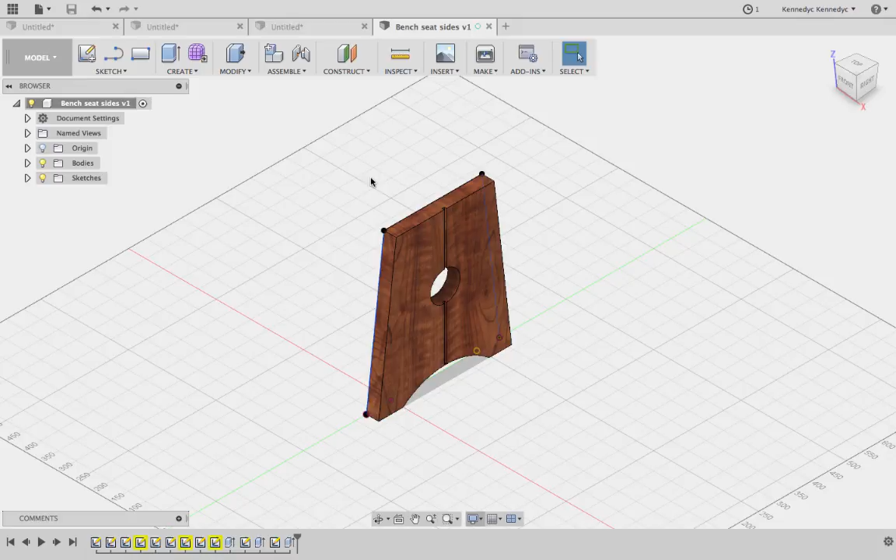The second way, and possibly even the easiest way to make the bench seat sides, is to come through and insert your plans as a canvas. So I'll show you how to do that.

I've actually taken a screenshot of these plans. You can do that easily. If you've got a Mac, Command Shift 4 brings up these little crosshairs and it asks what you'd like to take a screenshot of. Just that section there.

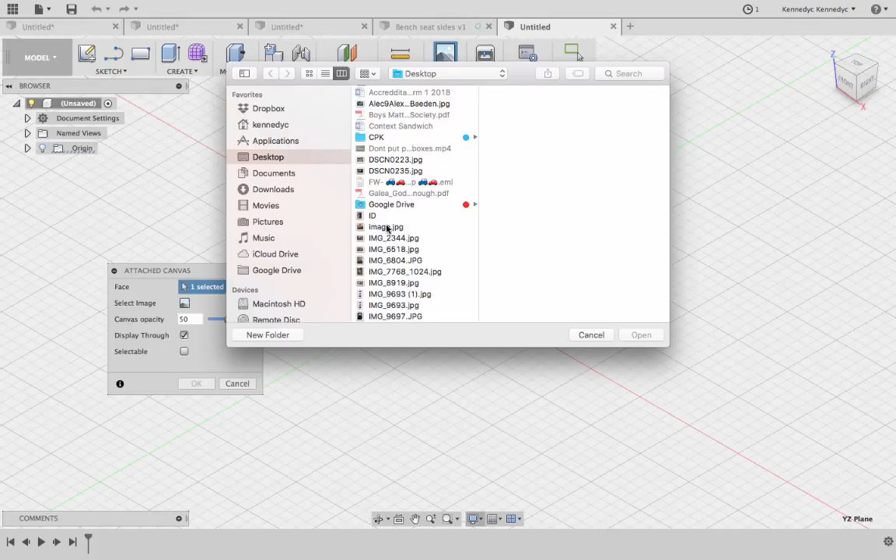We're going to come through and insert that into the drawing. Up here under Insert, we're going to attach what's called a canvas. It asks you which face you want to put it on, and it's easiest if you come through from the beginning and click on the right hand side face. Select the image, so if I come down to my desktop, take that screenshot I just took, and click open, you'll notice it will drop it into your drawing, click OK.

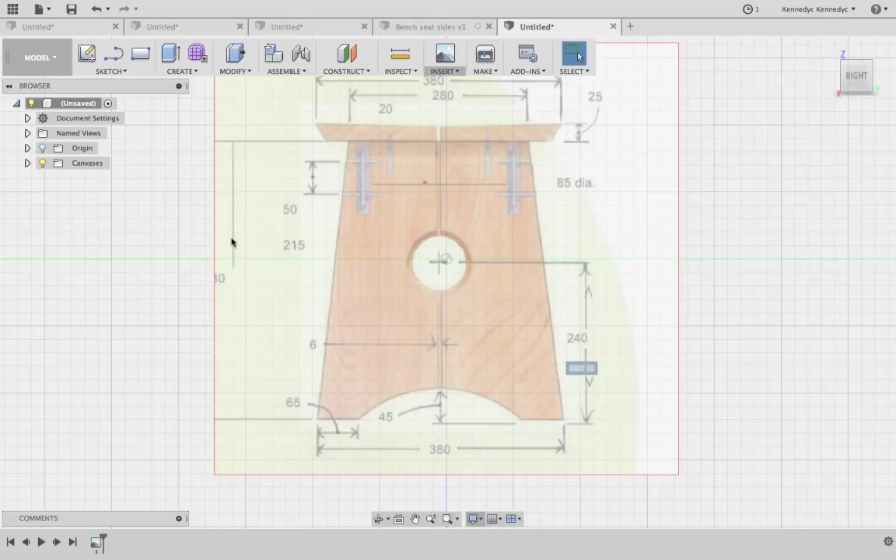Now zoom in on that. If I go to my right hand side view, it's quite small. So what we actually need to do now, so that I've got a scale 1:1 drawing, is use a tool to calibrate it, which means bring it into the correct scale.

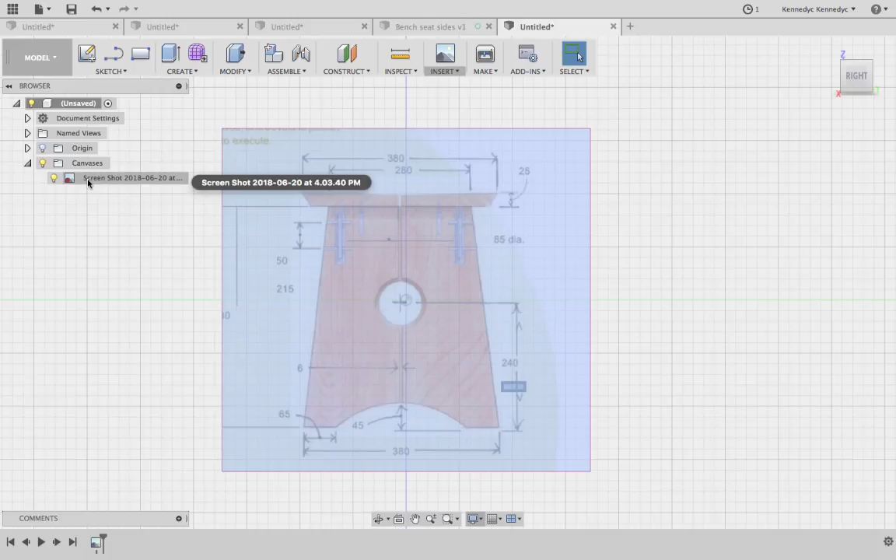So over here, we're going to open up in our visualization the canvas. You can turn it on or off so you can see it or not. We want to leave that on for the beginning and click on the image here. You can right click or control click and calibrate.

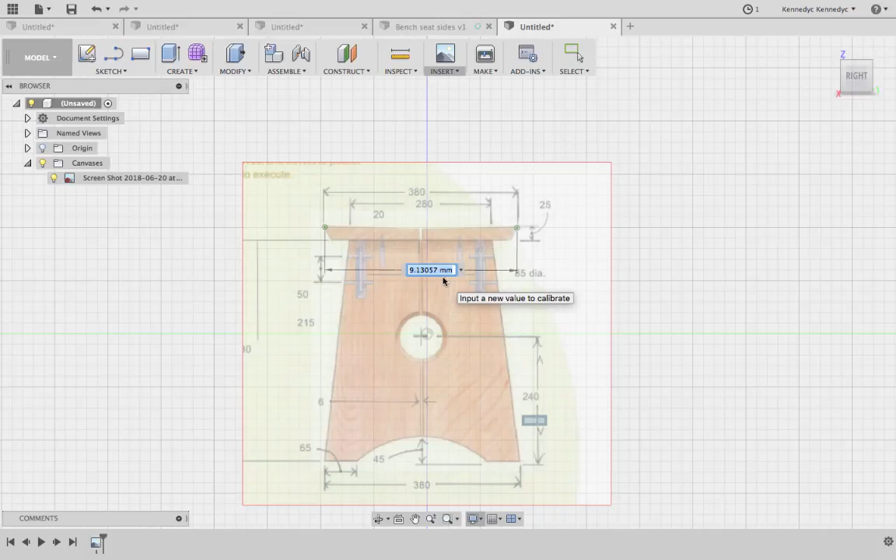Now what that's going to do is ask me to pick 2 points on the page. So I'm going to pick a nice long dimension here, this one, 380. If I click on that point and that point there, it says on the drawing, just the way that I've dropped that image in, it's 9mm. That's why it was so small. What I want it to be is 380.

So I'm going to type that in, click OK, and you'll notice it's blown that drawing up. So I need to zoom right out. And now it's in the correct scale.

So I can come through and start to trace this out or draw over the top of it, put my construction lines in and work that shape out.

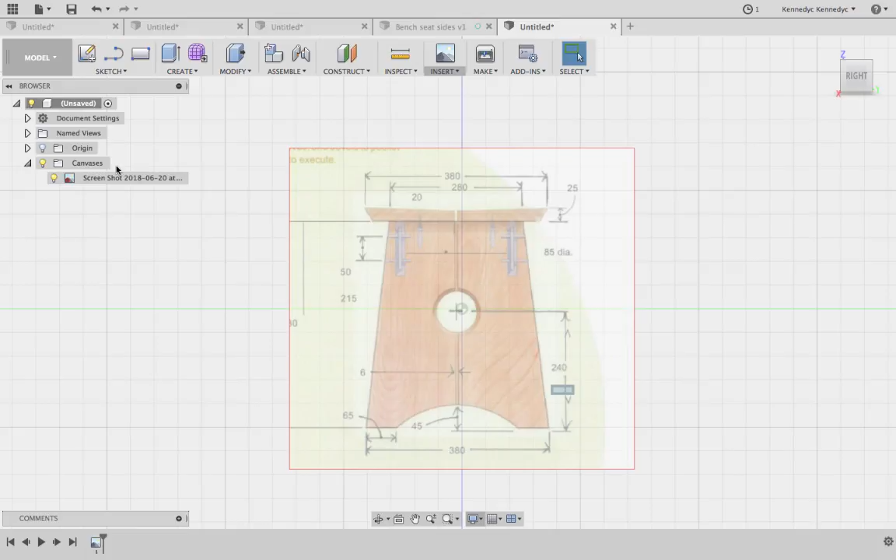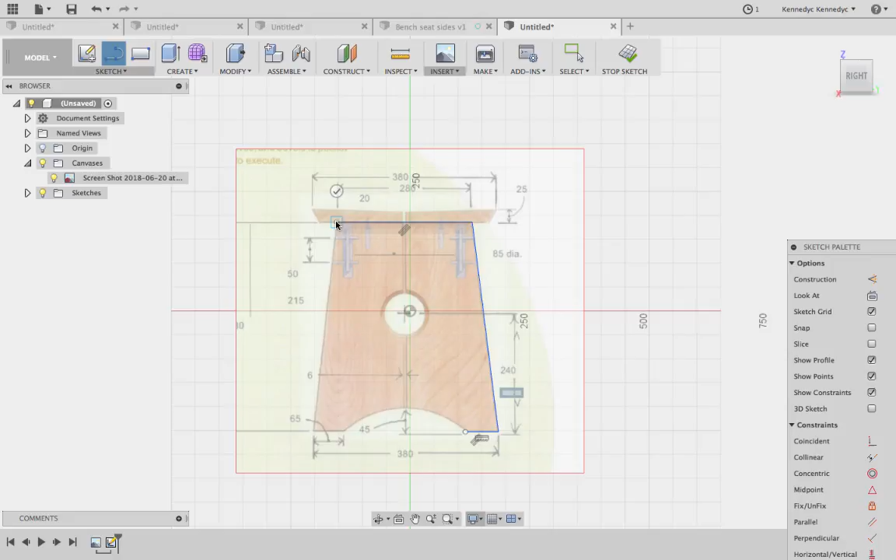If you come through and choose your line tool, it'll ask you which plane do you want to work in. We're going to choose that right hand plane there, and I can just start to come through, let's say from this point here, and click, click, all the way around. I'm just going to trace that. Nice and simple.

If you're having trouble getting it nice and straight, then zoom in, and it'll allow you to move a bit more accurately when you're zoomed in on that.

Click on that point there, and we're going to actually put our green tick there to detach that. Change it to an arc by 3 points. So we're going to click from here, and it'll say, where's the second point? That is, what's the diameter of the arc you want? It's just to there. And then the third one, it's going to bend that up. So I'm going to find the center, click, and you'll notice that color changed.

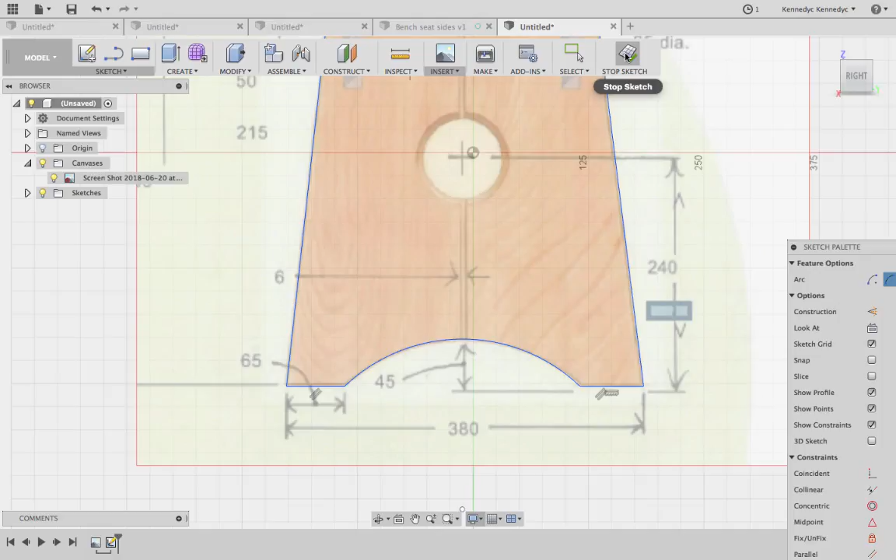So I'm going to stop sketch. Because I've actually filled in that shape now, if I come through, I can turn the canvas off now that I've picked that up, and it's shaded that, which means that I'm actually ready to click E for extrude, select the profile, and according to my plans, these legs are a thickness of 35mm thick.

So in my box here we can drag that out or the other direction there, but I want to make it very accurate at 35mm. Click OK, and there's my legs.

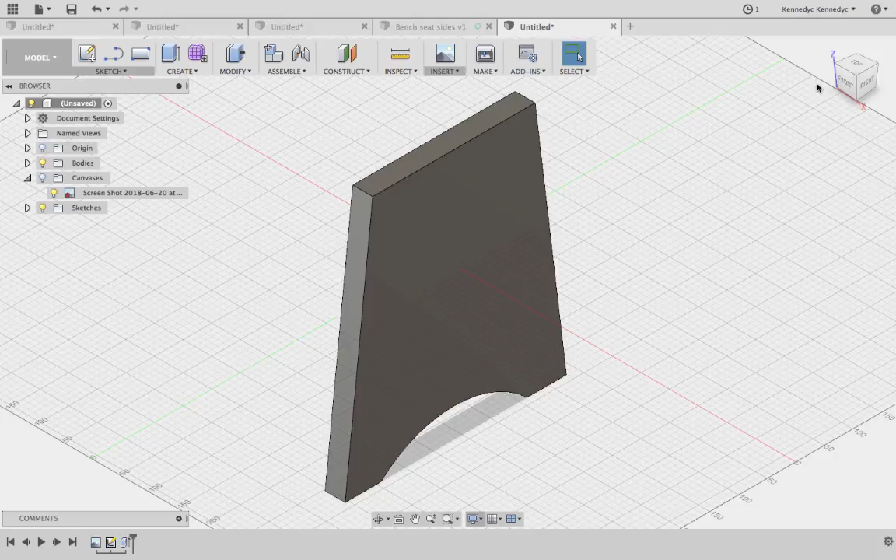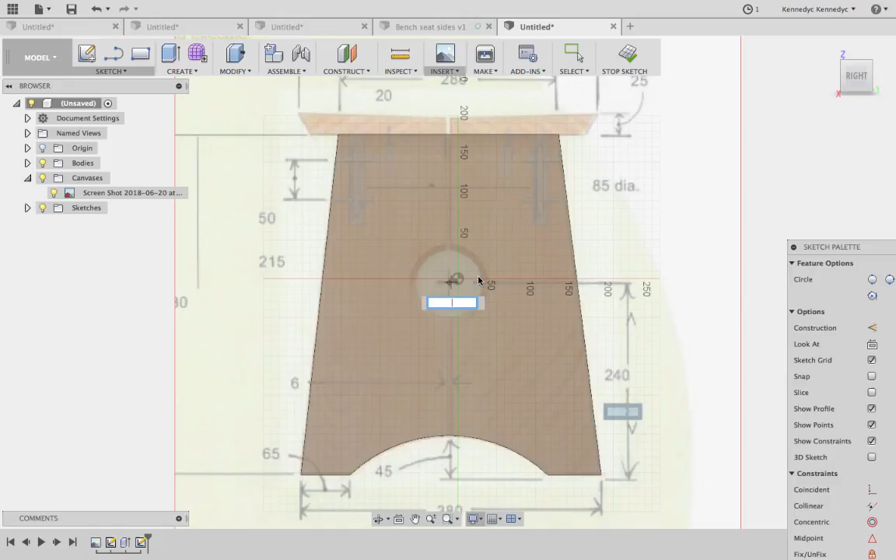If I come back to the right hand side view and turn my canvas back on, I can work out where I cut that hole and where I put my groove in here. And to do that, we're going to use the circle diameter tool. Click in the middle of the circle, and this one, as you can see here, it's a diameter of 85 millimeters. So you can actually come through and just work it to the drawing there or to the canvas, or you can type it in: 85 millimeters, click OK, and stop sketch.

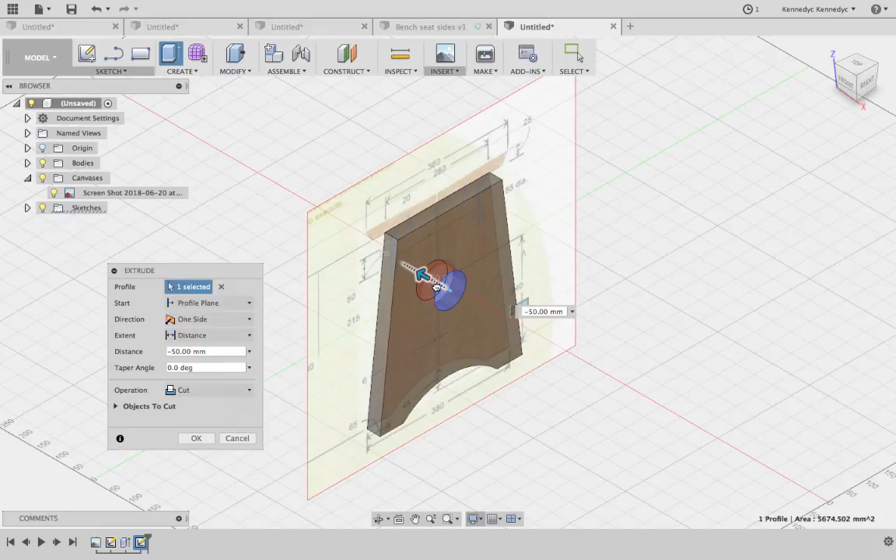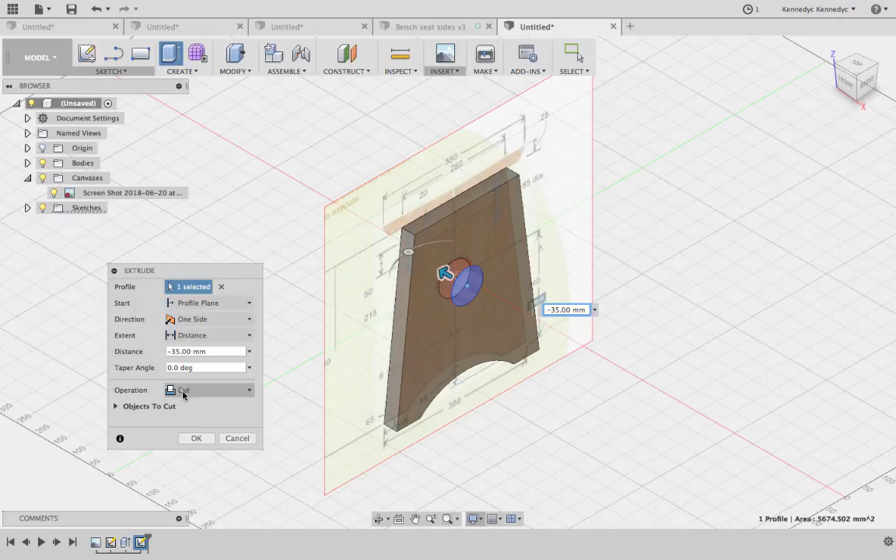Now I'm going to click on that circle, E for extrude, select the profile, and this time we don't want it to extrude out of there, we want it to go into it. So you'll notice here, this operation, when I go into a solid object, oops, just do that again, E for extrude, it actually changes to cut, which means it's going to cut a hole in there, which is just what we want. I'm going to change that to 35 millimeters. It's saying it will cut. Now I click OK, and then it's cut my hole in there.

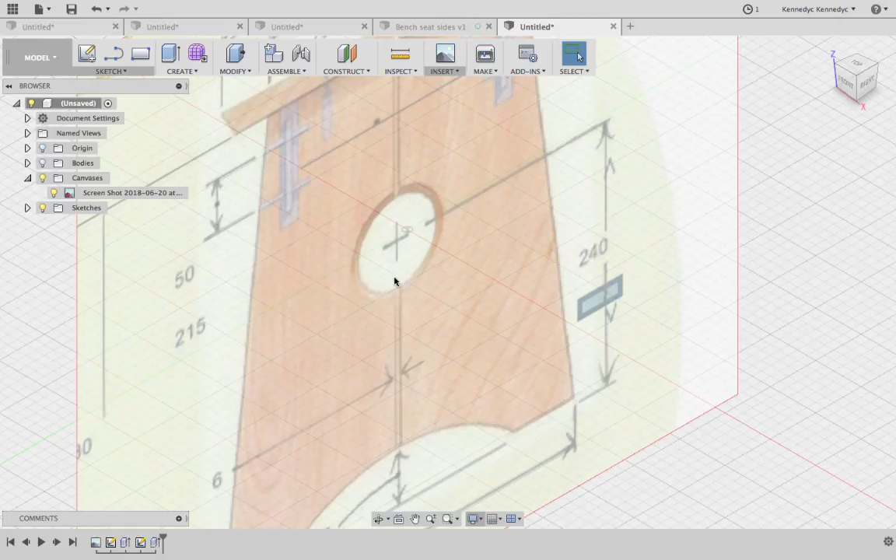You'll notice on the canvas that there's actually a chamfer around there. That is a 45-degree routed edge around there. So we can do the same if I just turn off the bodies and look at the canvas. You can see that there. Turn that back on. Get rid of the canvas now, and we can go to modify and put in a chamfer. You can do a round over if you like, or a different type of router bit. We just want a chamfer if you're copying the plans.

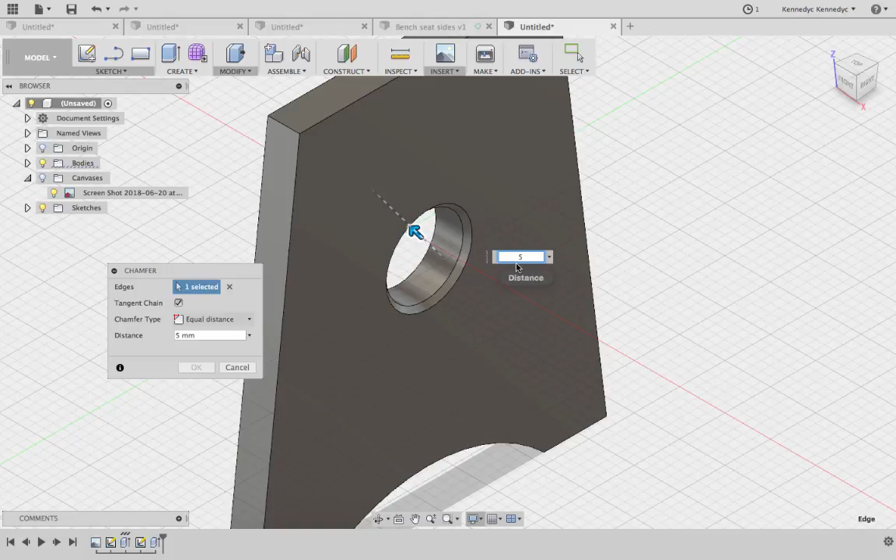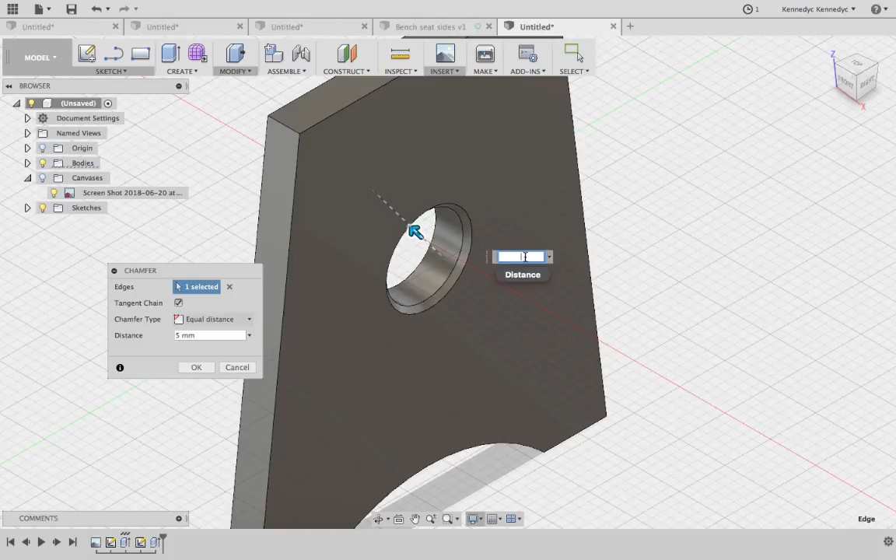And you're going to click on the edge that you would like to chamfer, and then you can either drag it, big one, small one. We might start off with 5 mil and see what that looks like. That's looking pretty good. If I have a look at the plans, I wonder if it tells me. There we go. It says that we've got a 6 mil cove. So that's saying it's not a chamfer, it's a cove, which is a bit more of an internal round over. I'm happy with the chamfer for my project. So I'm going to leave that on there, and we'll make it 6 mil as well, so it follows the plans. Click OK, and that's done.

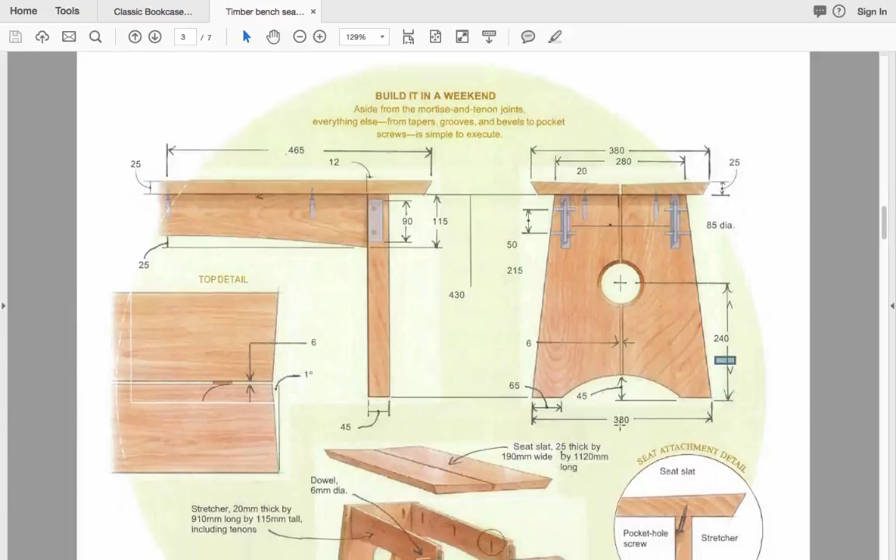You guys are going to come through and draw a rectangle on the face there now. Extrude it in. The distances are, it needs to run through the center. It needs to be 6 millimeters wide, and it's going to be a groove 6 millimeters deep as well. So you'll cut it into that object 6 mil deep.

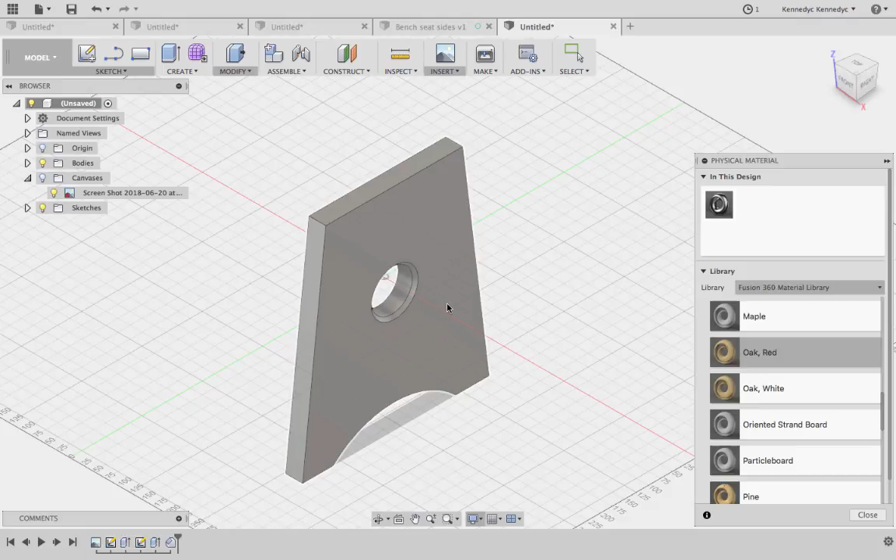When you finish, of course, come through and change the physical material depending on what you're making. I've got the wood open there. I'll change that to mahogany. See if that takes. Not liking that for some reason. Check my visual display. There we go. Had to wait for it to be highlighted. And you can play around with those materials.

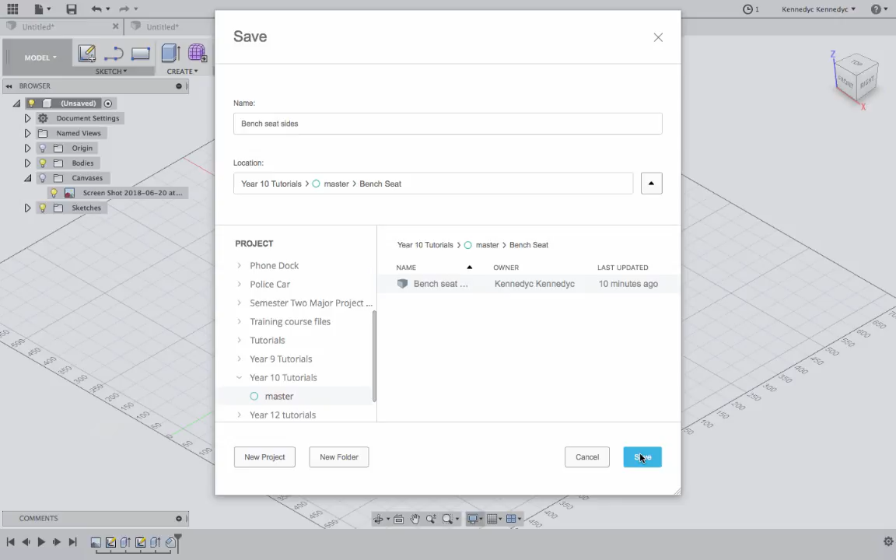Again, don't forget, save your work in the correct folder. So for this one, for me, it's in my Year 10 tutorials folder under bench seat. And we're going to call this one bench seat sides using canvas.